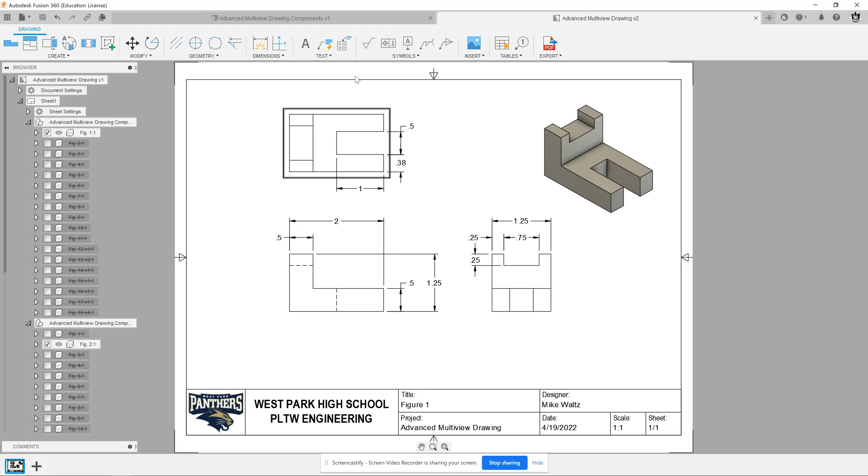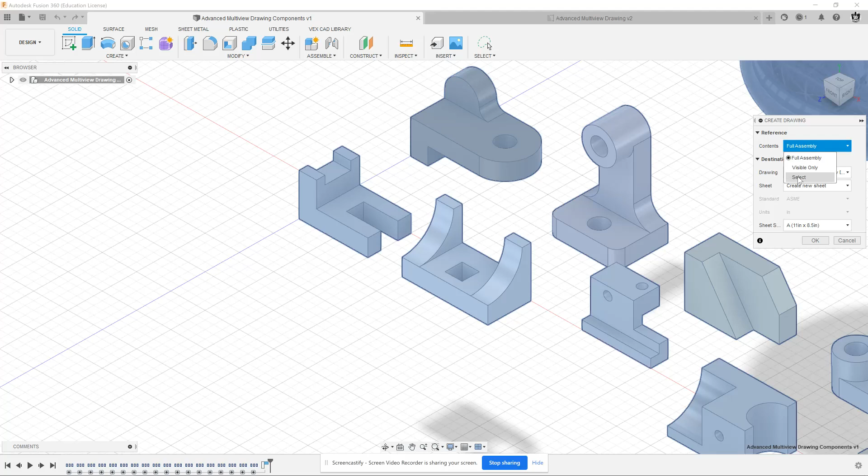The easiest way is to click on your advanced multi-view drawing components, go up to design, just like we did before, drawing from design. Instead of create new, which is what we did before, we choose advanced multi-view drawing. It puts it into the drawing we already created and creates a new sheet. For contents, we change that to select, and we pick this one, which is figure two, and hit OK. You can see it creates a new sheet here.

It wants to do 1/2 scale again, so I'll change that to 1:1. Also, you can see we got visible and hidden edges, that's good. Click there, then click OK. For projected view, click on your front view, go up, go to the right, go up to the right, hit the green check mark, and you get all your views.

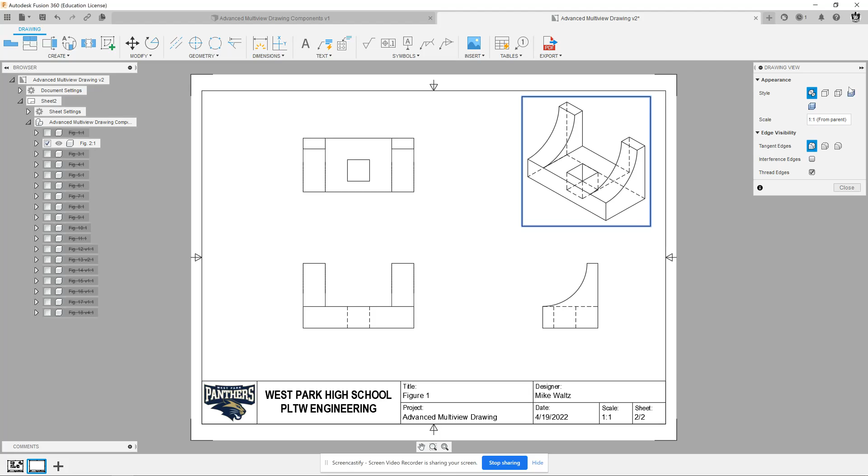This one, we're going to double click and change it to shaded. Before I forget, down here on the bottom we change this—it says figure one, I'll change this to figure two. Boom, cool. And what have we done? Look down here in the bottom left, you can see now there's two sheets showing in the drawing.

So that's what we've done—we're creating multiple sheets inside one drawing. This is the pro way to go. Now, if this didn't work for you, you can get help in class. What I'm going to do is in the video for figure three, show you another way to do it if this way doesn't work.

Basically, this way only works if you open the drawing, start the drawing, and keep going making sheets. If you close the drawing and try to keep working on it later, it breaks this workflow, unfortunately. So I have an alternate way that I'll show you in figure three. Anyways, hope that all makes sense.

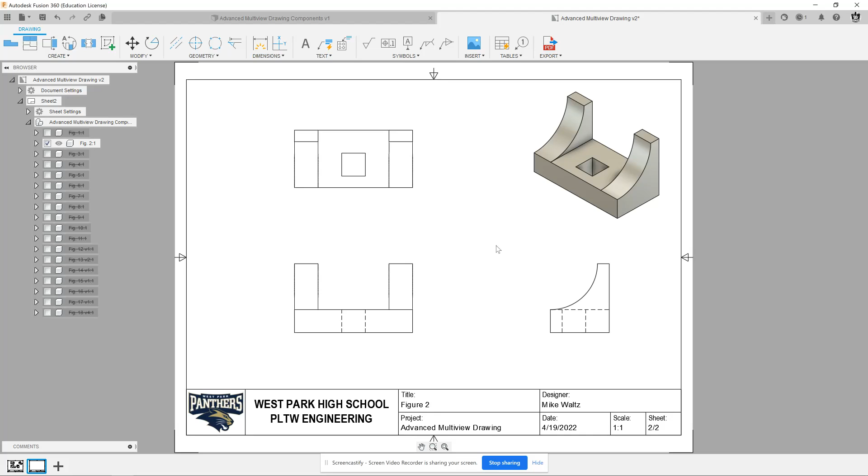So let's look at this thing. If you look at it from the front, you have a kind of U shape so you could extrude back—that's one feature. The other two features are this quarter circle cutout and a square hole that goes in. So I look at it as having three features. Remember, you need size and location for each feature, and you need your overall dimensions.

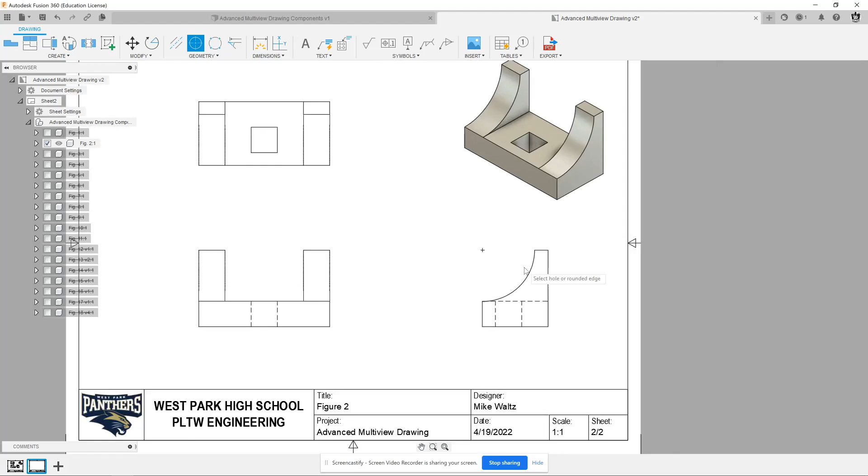We do have circular features on this one. The first thing we want to do is put in a center mark, clicking on this arc. Because it's not a full circle, we don't want center lines going in the front and top views—that would just confuse people. The center mark over here is probably enough. Since we're looking at this view, we'll go ahead and dimension it—hit D for dimension, click on the arc, and put that right there. That's the radius of the arc, that's sufficient. Then we want to locate that arc.

A smart viewer will figure out that if there was a rectangle here, the center would be in the top left corner. But we want to give them a little more information to make sure they get it. So what we'll do is dimension these two short sides here, this one and then that one, so they know where to go.

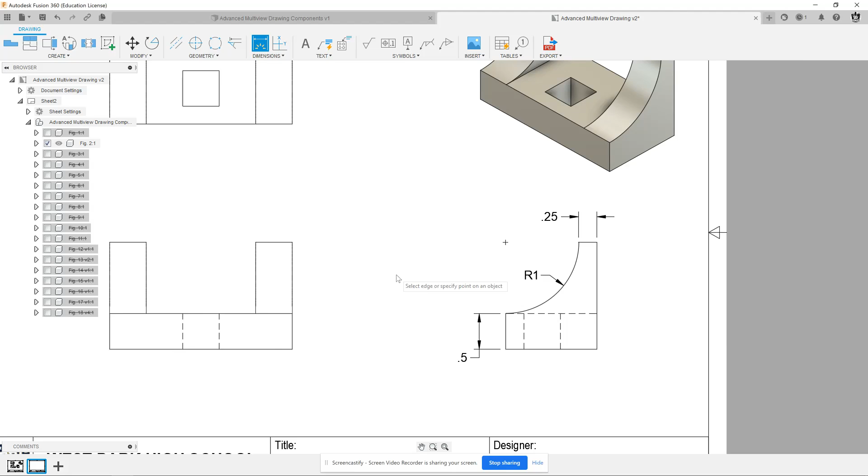Okay, cool, so that one is ready to go. We've dimensioned that quarter circle feature. They should know exactly how to make that now.

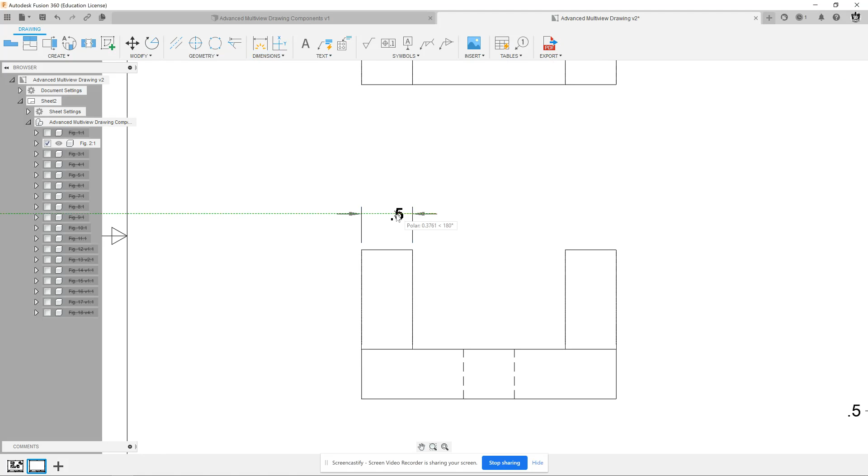Now we're going to go work on the U-shaped feature over here. It's got this thing that sticks up, so we'll dimension the width of that. Notice I put this 0.5 on the right side—that's a little unfortunate. What I'm going to do is hit escape, drag this 0.5 towards the middle, let go of it, and put it in there.

The reason it's unfortunate is because I need to put a dimension here between there and there. And it wants to put it wherever—it doesn't want to line up exactly. What you can do, if things don't line up, I've shown this before: hit escape, click on the number, drag this circle, move your mouse over while dragging to the other dimension, and it'll pick up that point. Then when you come back, it'll snap right in.

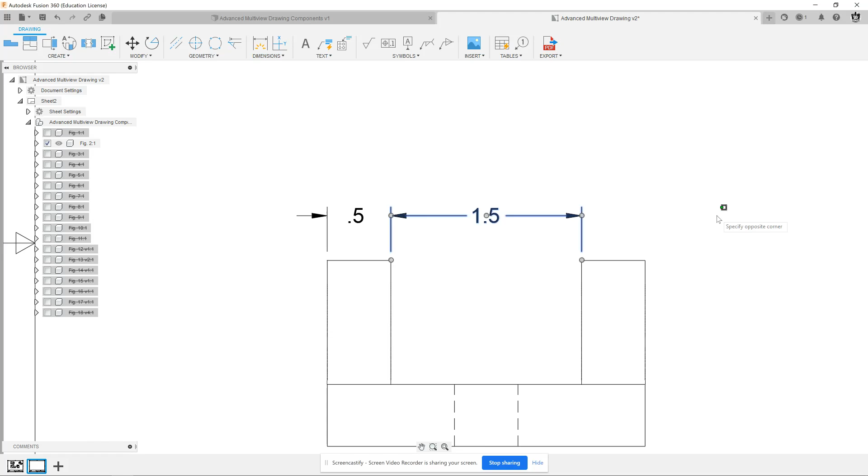So now we know this part is 0.5, this part is 1.5. How big is this part? Well, we usually don't do that. Instead we do the overall dimension of width, going from corner to corner, and then up here. So this is a situation where 0.5 plus 1.5 equals 2, and 2.5 minus 2 equals 0.5. That's enough dimensions for that.

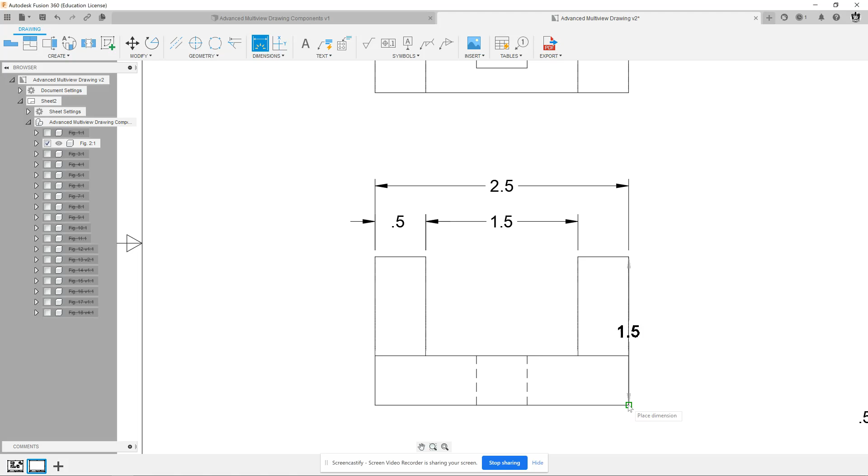We also need to show over here the height of the whole thing, so we'll go from top corner to bottom corner. Now you may say, Mr. Waltz, we need to show what is the height of this line—well, that's that same line from over here, that 0.5. We already mentioned that, so that's done.

Last thing to do is the top view. So we've done overall height, overall width, so we do need overall depth—we need to make sure we include that. So we're going to go D for dimension and throw that in there.

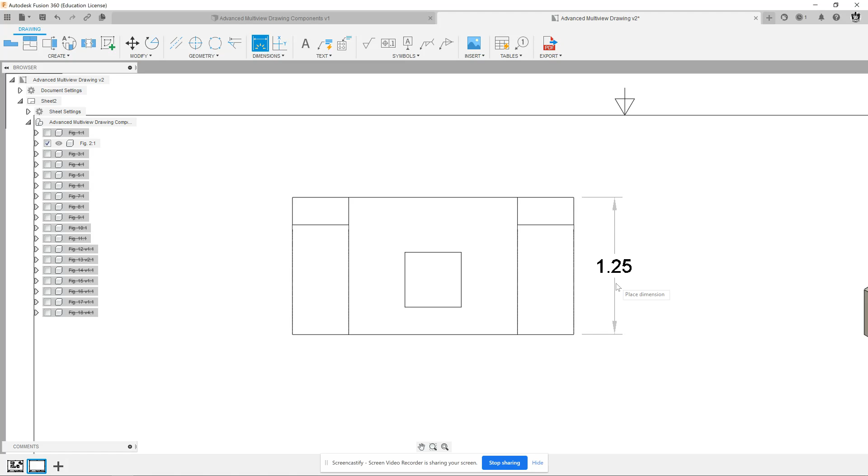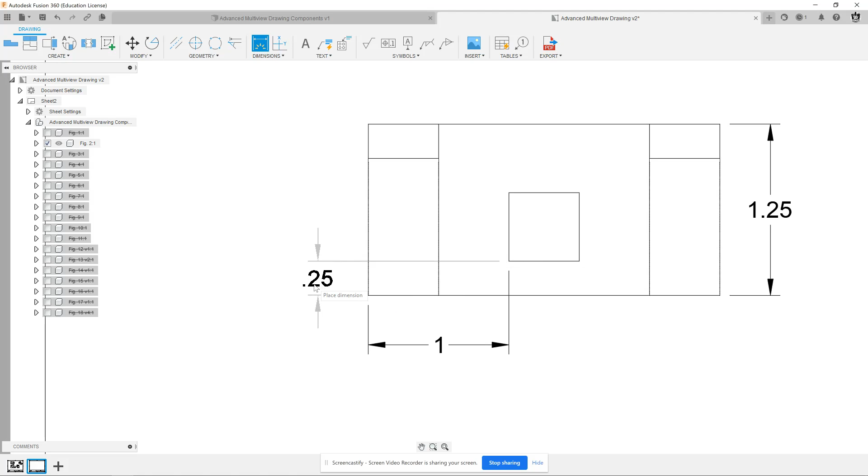The other thing we need to do is locate and size this square. Let's do location first. I'm just going to use the bottom left corner here to here. Now it gives a diagonal dimension—if you move your mouse left, it will go aligned for you, which is nice. I'm going to go from here to here and then straight out to the left. That gives me the location, so I know where one corner of the square is.

Then I just need the size of the square. I'm going to click the left side, come out here, try to line that up; click the bottom, come down here, try to line that up. Now you can see these didn't line up very well, so I'll work my magic: hit escape, click the 0.5, drag it in here to the middle. That's good. Now I want to drag it up a little bit to get it to line up with the other arrow—just put your mouse on that point, move it over, and it'll line up.

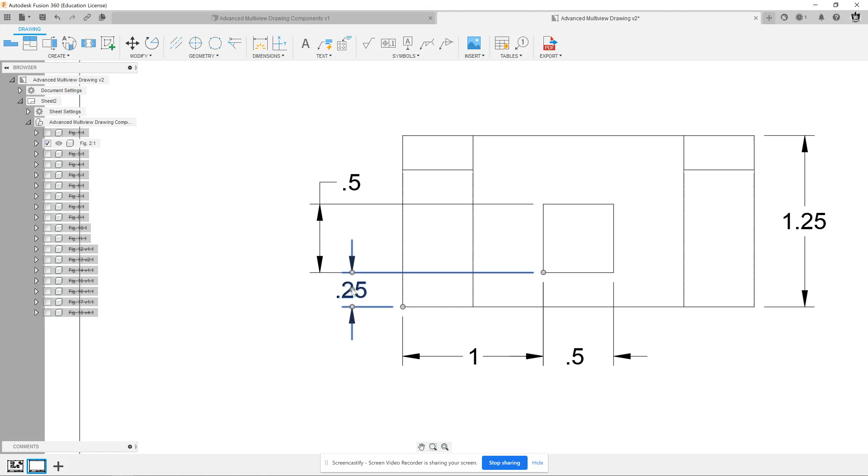Up here, I don't really have enough room to put the 0.5. Watch this—if I put the 0.5 in the middle, it sits on the other line. So I'm going to keep the 0.5 above, and instead drag this 0.25, click on it, drag the number, line it up with that point, bring it down, and that's a pretty good looking dimension. So that is it for this one.

Those are all the dimensions for Figure 2, Advanced Multiview Drawing. I would recommend saving every time you make a new sheet. Go ahead and go on to Figure 3. Good luck, have fun.